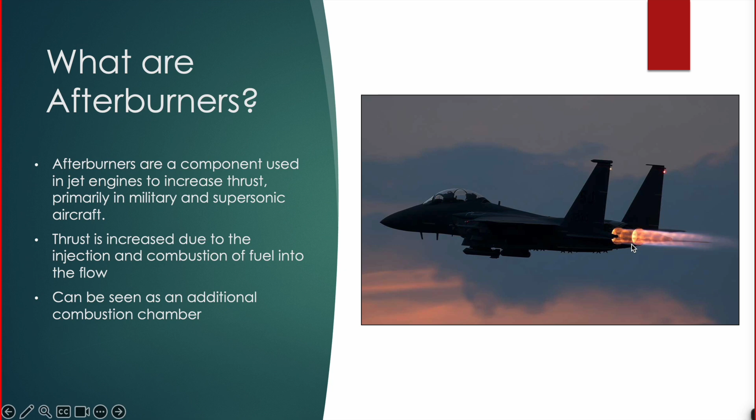So what are afterburners? Afterburners are a component used in jet engines to increase thrust, primarily found in military and supersonic aircraft. Thrust is increased due to the injection and combustion of fuel into the flow. It can be seen as an additional combustion chamber, and an afterburner can be found over here on the right. Additional fuel is ignited inside of the exhaust, creating an afterburn.

History of afterburners: afterburners were first developed during World War II to boost jet engine performance in military aircraft. The concept was inspired by turbojets but included a secondary combustion stage. Some key milestones were the introduction of afterburners in aircraft like the Concorde and F-4 Phantom.

In the 1940s, the Caproni CC-2 was the first aircraft that experimented with afterburners. In the 50s, the Lockheed F-94 Starfire was the first operational afterburner. In 1969, Concorde had the first civil use of afterburners. Then in the 1970s, variable area nozzles to improve thrust control were introduced. In the 1990s, there was a focus on reduction in emissions and noise impacts.

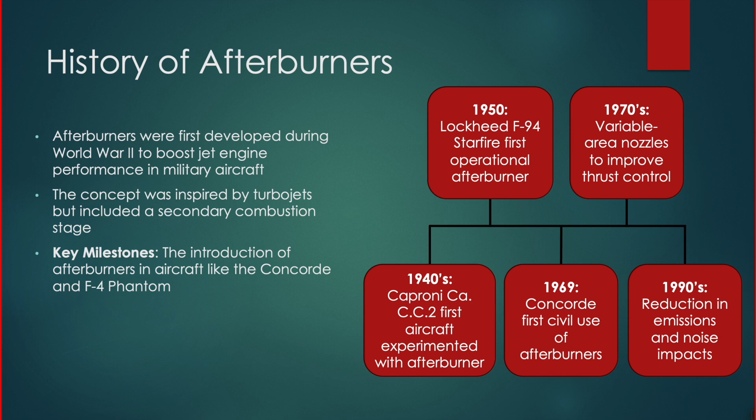The first afterburners in Italy: the Caproni CC-2 was the first aircraft to incorporate and fly with an afterburner. It can be seen here being tested. The back is taken off. That's the afterburner burning. In 1943 in the U.S., the National Advisory Committee for Aeronautics, NACA, the predecessor to NASA, began testing an afterburner.

fitted onto a General Electric I-A engine. In 1946, the U.S. Aircraft Engine Research Laboratory achieved thrust gains on the General Electric TG-180 engine in the altitude wind tunnel, which can be seen over here on the right. That's the TG-180 right there.

Then in 1949, Pratt & Whitney developed the first mass-produced afterburning turbojet, the J-57. It can be found on the B-52 bomber and a lot of older aircraft.

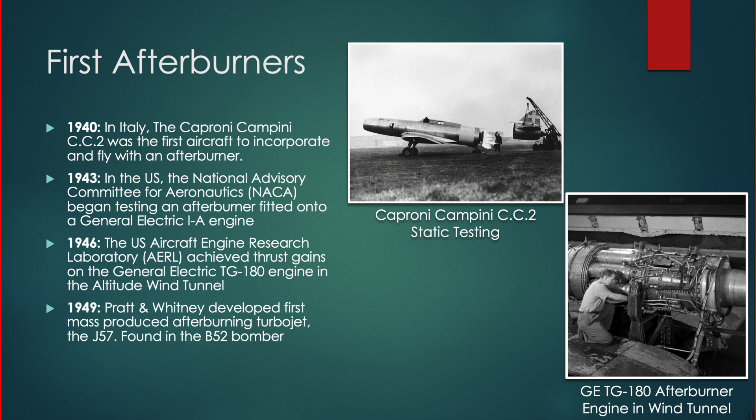This is the Pratt & Whitney J-57. It was the first engine with afterburner to be mass-produced in the 1950s. It's found on the F-100 Super Sabre, the B-52 Stratofortress, and the Lockheed U-2. It produces a thrust of 52 kilonewtons without afterburn, but the afterburner increases the thrust to 76.5 kilonewtons.

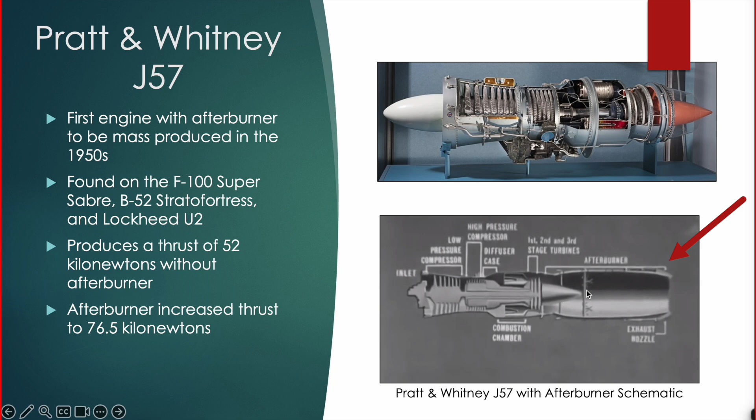Here we have a picture of the J-57, and below it is a schematic. You can see the turbine here with the afterburning stage following it, with these fuel injectors to add additional fuel into the exhaust, creating the burn.

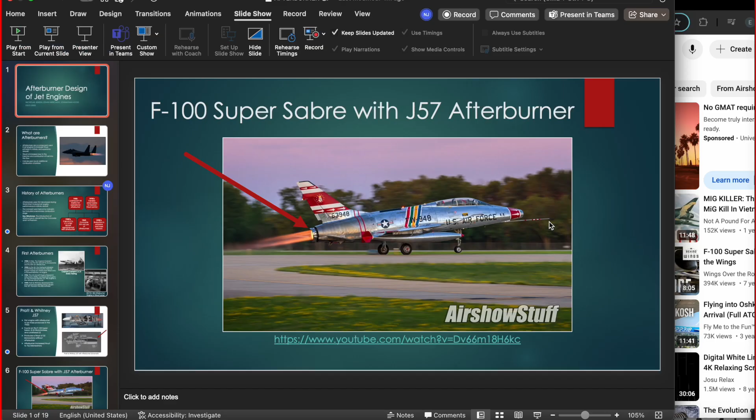Here we have an F-100 Super Sabre with the J-57 afterburner taking off, and that's the afterburner there. I'll go ahead and show a little clip of this aircraft taking off.

As you can see in the video, the afterburner reduces the takeoff time, and we'll get into that in this slide. So why use an afterburner?

Afterburners increase the efficiency of jet engines by burning additional fuel in the exhaust, boosting thrust without the need for a bigger engine. The process adds extra fuel to the high temperature exhaust gases, igniting them to create a higher velocity exhaust.

How thrust is increased: adding more energy to the exhaust stream leads to higher exit velocity and thus more thrust. As you can see on the graph on the right, to achieve the same altitude in less time, an afterburner will greatly reduce the time. You can see in the video I played before how fast that Super Sabre took off.

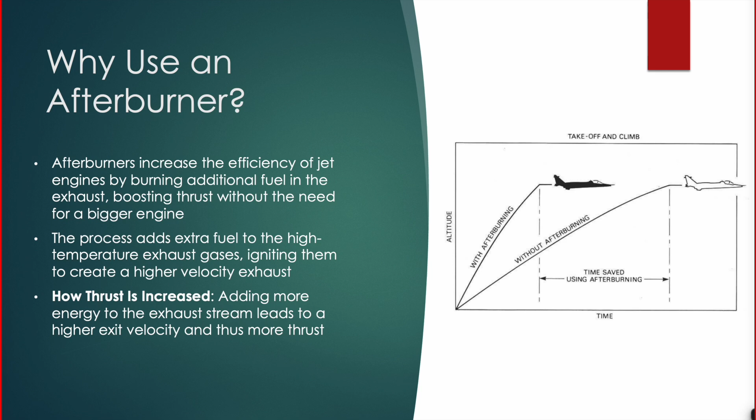Afterburner function: flow coming out of the turbine exit is slowed down to allow for stable combustion. Fuel is mixed in with the stream in turbulent currents. An igniter provides stable combustion, and bypass flow keeps the jet pipe from reaching melting point temperatures.

You can see here by the schematic, these little fuel injectors are called V-gutters, and they help stabilize the flow and ignite the fuel to provide additional thrust.

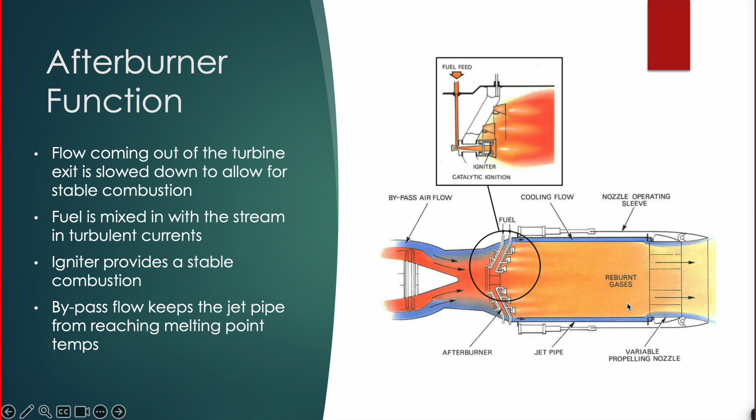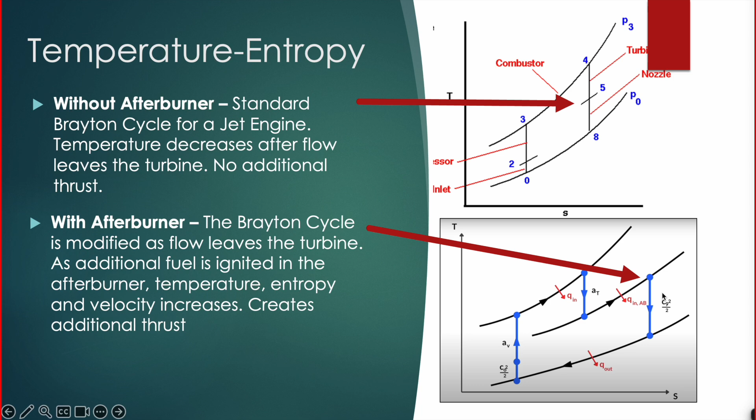So looking at turbojets with afterburners, in the older aircraft, they used turbojets instead of turbofans to maximize the speed. Turbojets directed all flow through the engine core, where it is compressed, combusted, and expelled at high speeds.

Turbojets are not as fuel efficient at low speeds, and early fighter jets such as the F-4 Phantom II and the F-104 Starfighter used turbojets with afterburners. On the right, we can see the Lockheed F-104 Starfighter. That is an aircraft that used turbojets with an afterburner.

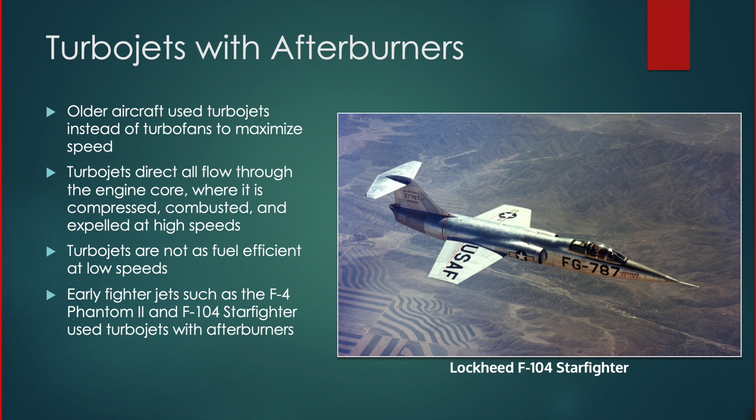For turbofans with afterburners, modern aircraft use turbofans instead of turbojets because they have better fuel efficiency while maintaining speed. Turbofans use a large fan at the front of the engine to bypass air around the core, creating more thrust with lower fuel consumption. Turbofans generate thrust from both the core exhaust and bypass air, and modern fighter jets like the F-35 and F-22 use turbofans with afterburners to achieve supersonic speeds and fast takeoffs.

On the right, we can see the Lockheed Martin F-22 with afterburner, and you can see the afterburning effects at the exit of the nozzle on the right side.

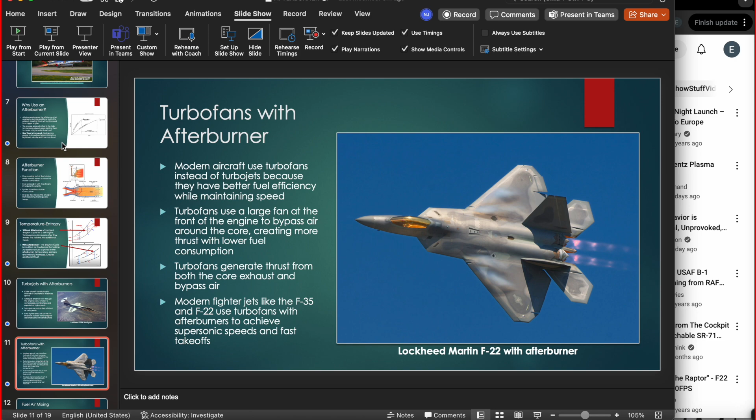So looking at fuel-air mixing, the uncombusted oxygen from exiting the flow provides further combustion with the fuel that is injected and then ignited. Exiting flow from the turbine is too fast for the fuel to combust, and it'll blow away before it's even combusted at the high speeds coming out of the turbine.

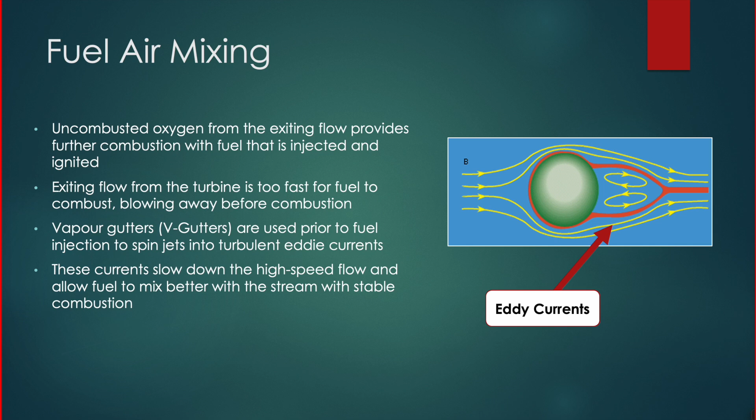Vapor gutters or V-gutters are then used prior to the fuel injection to spin the jets into turbulent eddy currents. On the right side, you can see what the eddy currents look like going over the flow of a cylinder. These currents then slow down the high-speed flow and allow fuel to mix better with the stream with stable combustion.

Looking at the flame holders in the V-gutter, V-gutters are flame holders. V-gutter flame holders are the most commonly used in afterburners. The V-shape creates low-pressure wakes where the hot gases recirculate, such as the eddy currents that I just talked about. It also allows the fuel to ignite and stay lit based on its geometry.

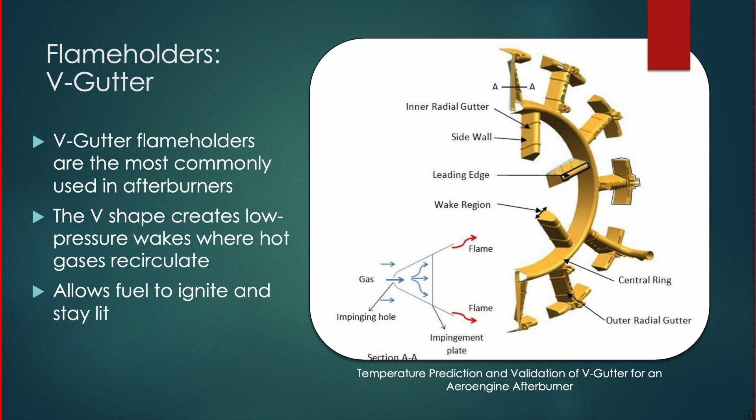Looking at some afterburner enhancements, more specifically the nozzles. The variable area nozzle varies the exit area to control the pressure ratio across the turbine. So when there's more afterburning being done, there's a greater pressure buildup, and due to the greater pressure buildup, a larger nozzle area is required, which the variable area nozzle is able to adapt.

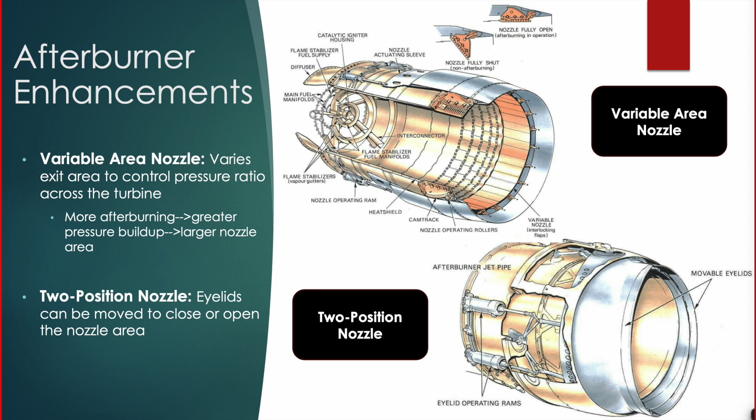The two-position nozzle features two eyelids that can move independent of each other, and they can also be moved to close or open the nozzle area as well. So it's kind of just like a secondary option or type of nozzle.

Looking at the material selection, the afterburner components are subjected to very high temperatures that materials need to be able to withstand. Some challenges that come from material selection are thermal expansion, oxidation, and the risk of material fatigue due to these repeated high temperatures.

Some common materials that are used are materials that have high heat resistance and durability, such as superalloys, ceramics, and advanced composites. Looking at the picture on the right is an F-16 Falcon F-100 with ceramic composite seals shown in the 5 yellow arrows above. These were replacing superalloys that are currently used, and this was for a test fire.

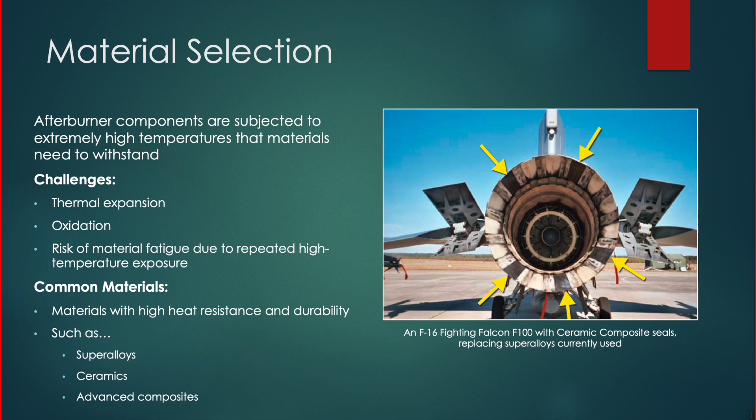So what makes an effective afterburner? Fuel-air mixing is one of these. It's proper mixing of fuel with the exhaust air, and it is crucial to ensure that fuel is evenly distributed for complete combustion. Flame stabilization, maintaining stable combustion, is key to preventing backfiring, which is when the pressure at the exit is too high. The pressure in the nozzle itself is too high compared to the turbine exit, and then the pressure pushes back and forward through the system, or causes unstable engine operation. Looking at space efficiency, afterburners are compact, and they require efficient integration within the engine's overall design.

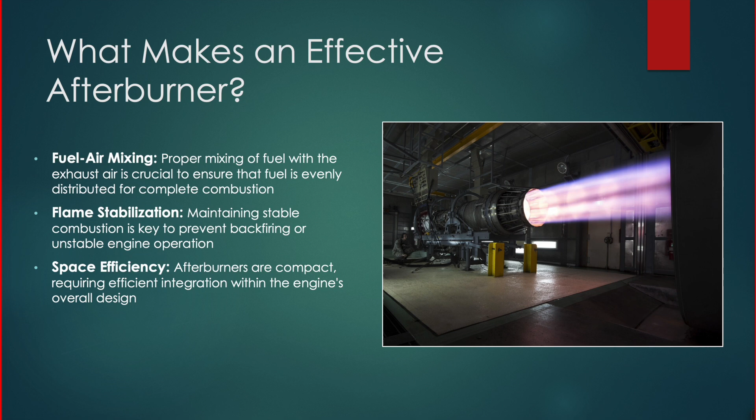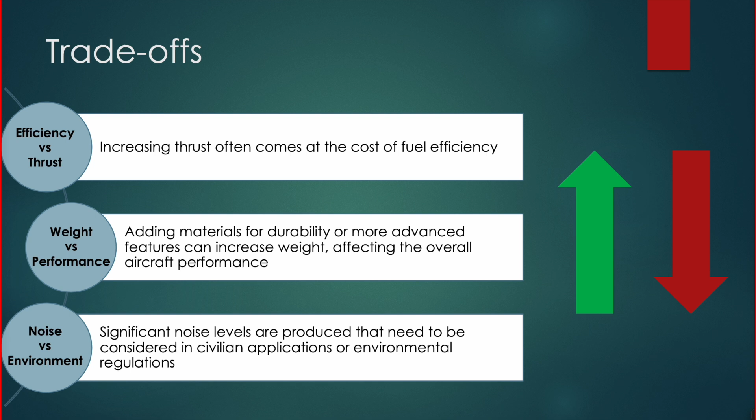Looking at the trade-offs, first up is efficiency versus thrust. Increasing the thrust often comes at the cost of fuel efficiency. Looking at weight versus performance, adding materials for durability or more advanced features can increase weight, which then affects the overall aircraft performance. And then for noise versus environment, significant noise levels are produced, and they need to be considered in civilian applications such as the Concorde or environmental regulations.